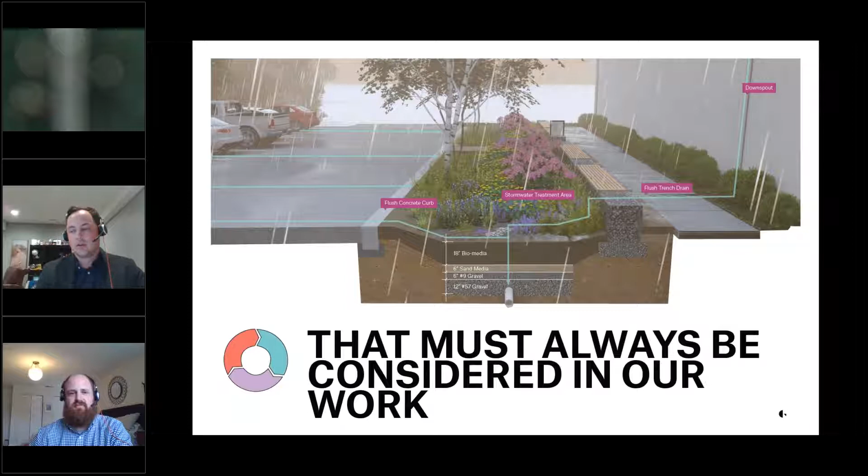This is how we've tried to weave this into our personal practice: those layers and systems should always be considered, whether we're talking about a small corner parcel development or a really big park master plan. We can always be thinking about these multiple systems at once.

So with that as our baseline understanding, we're going to walk through four projects. Matt will get us started. We're going to go from scale, smallest up to largest, and they're all pretty different types of work. We'll roll through those, and then do a little Q&A. I'll do my best, Matt, to advance the slides in a timely fashion.

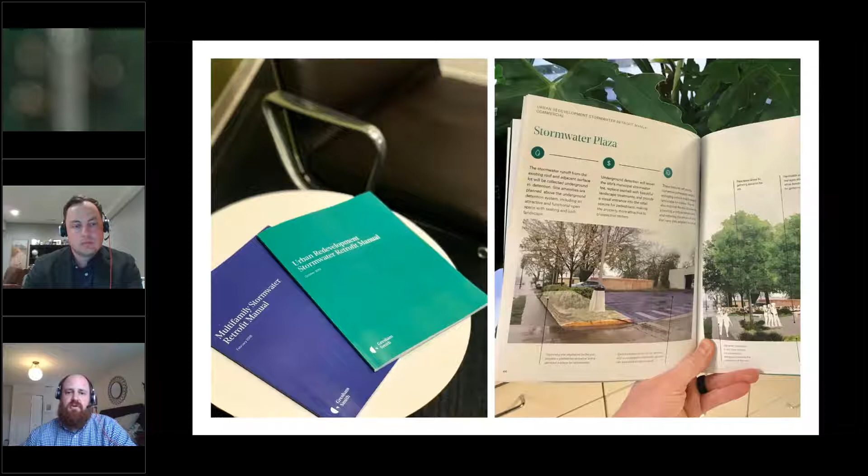The nicer you make these developments, the more rent you're going to get, the more you're going to fund the development. So our goal with these studies was: how can we revitalize these projects instead of ripping them down and building something new, which is extremely disruptive?

Just a little bit of background: all of these projects were located in the Royal Springs Aquifer in Lexington, Kentucky.

Stormwater quality there is absolutely critical and paramount, because that is the drinking supply for Georgetown, Kentucky. So everything you do in that region directly affects the residents of Georgetown, since that's where they get their water. Just a unique piece of it.

While we only studied a small piece that was in the aquifer, this is equally applicable to everything within Lexington and any other community for that matter. None of this was geared explicitly toward Lexington.

With this particular study, we looked at three different projects for this client. We looked at a large one, 150 Northland—your typical multi-building parking lot with drive aisles.

We also looked at one of the medium-sized properties, the 900 block, which was four single-family buildings converted to duplexes, triplex, and quadplex.

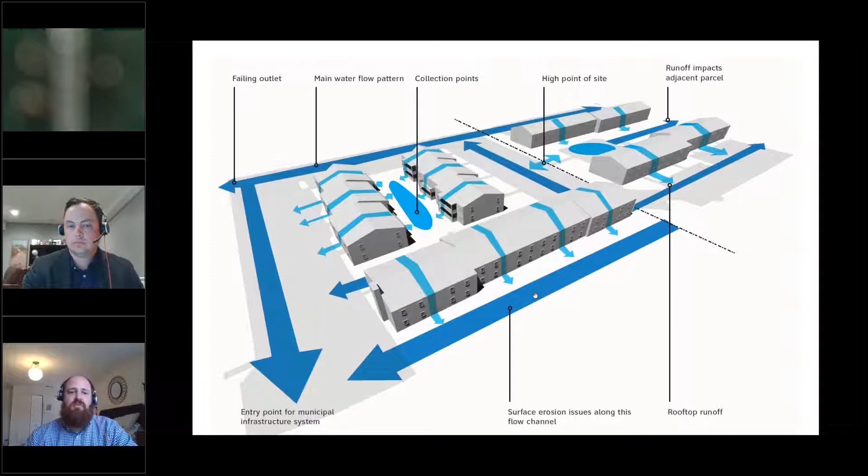So, you know, those were two obvious areas. And then the roadways around it, that asphalt was prime target for rehab. Just to give you an idea, that pool area - just before and after, coming up here in a bit as we go through it. This was one of those areas where we felt like we could spend that same dollar three times and really get the most bang for our buck.

So, big picture, we started looking at this area. We were looking at roofs. We were looking at how we can get that stormwater in there. We were also looking at what else that area could be - it didn't need to just be a stormwater facility. So you can see we've got a lawn gathering area, and some seating around that.

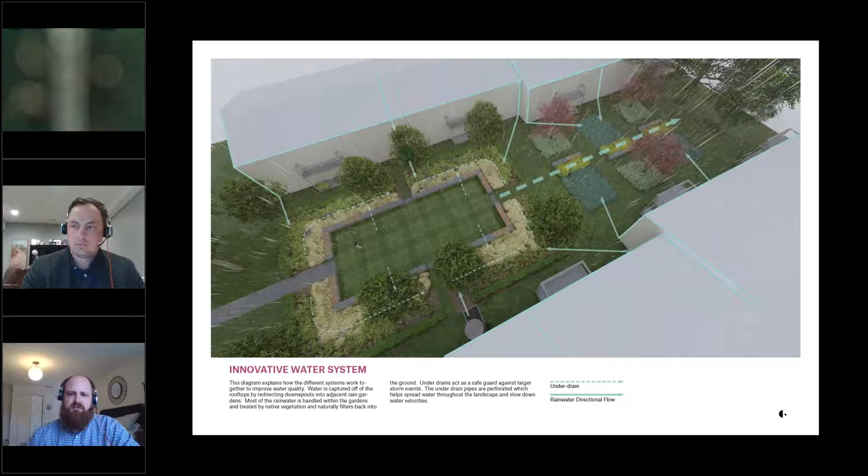So we had a thought, we had a plan. If you go to the next one, once we got people to buy into that, we could really dig in and detail what we were going to do. Each tenant had a little patio next to their unit, so we could see how this communal space was going to relate to their personal space. We had the BMPs with the vegetation in there.

These were going to become biofiltration areas with vegetated plantings. And most importantly, we're going to build that gathering lawn. So where it used to be an aquatic pool, it was going to become a flat gathering area that could be used for a multitude of different things.

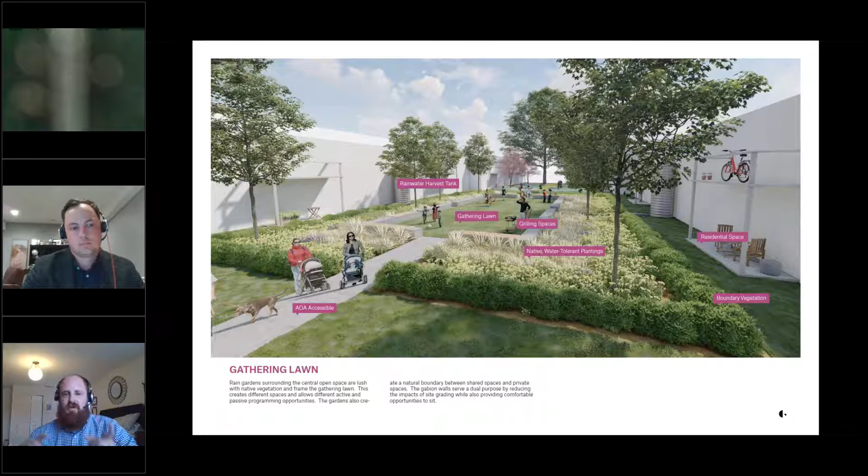We knew we were on the right path when the day the contractor ripped the pool out and then backfilled it flat. We had to wait a little bit to get another permit. Immediately, people were out there using that new flat vegetated area for a gathering space, playing soccer, doing all the things we said they were going to do with that area. So that was really enlightening and reassuring that we were on the right path.

So you can see here, you've got the bioretention facilities ringing the seat walls, you've got that lawn area to gather, you can see the interaction between the units and this area. So it really brings a lot of life to what was once a dead space.

And yes, I have always worked for landscape architects, and so that's how I don't talk like an engineer always.

One of the big pieces - two things about this. One, this is a stormwater grant project, so education, teaching people about stormwater is obviously a really important component. So there is educational signage all over the place, helping people understand what they're using and its function back to the environment. The other reason I really like this picture is I feel like even though we did have a fairly tight construction budget, I don't feel like we skimped on materials.

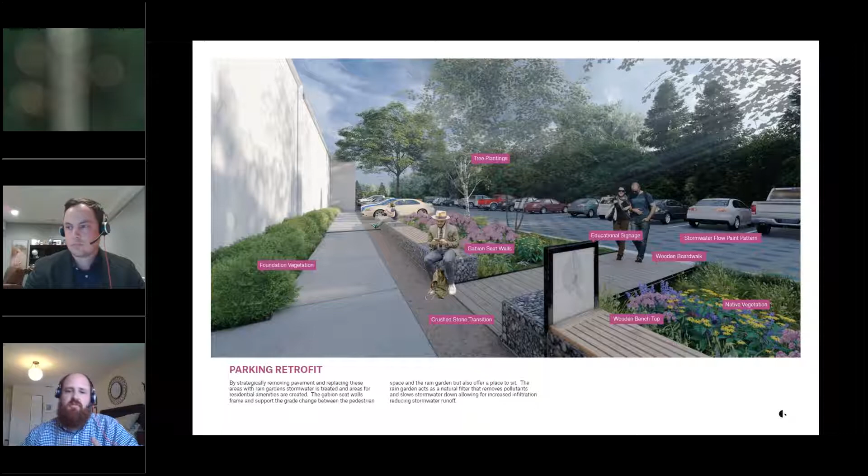So we were able to take this kind of pre-developed condition - and again, this was the vision that we had going into it - and we turned it into a gathering area. This is near the end of the development, so it was an area where people could gather and not get a ton of traffic going through. It picked up, again, roof drainage and parking lot drainage, two of the worst polluters out there. And again, this was one of those standard bioretention facilities that we put in the ground.

And it creates, again, a really nice area, and I think it does everything we were trying to do. Go one more.

Really one of the coolest things, I think, is we took what used to be some typical but not great apartments where you had cars parked, lights shining in, bumpers literally like 5 feet from your wall. Now these particular units look out onto a vegetated area, they don't have cars shining into it, so it really brings a lot of value to those units.

Yeah, I think one maybe piece to wrap this up, and the manuals that Matt described at the beginning, we have both of those available. I think both of them, definitely the multifamily one, available on our website, and I think they're available through LFUCG's website also.

This idea with green infrastructure is that it not be an afterthought, that you don't simply bury the infrastructure underground, or put the detention basin off in the corner where it's just doing its one job. I think the point we're trying to make here, and I have a very cheesy tagline for it like I do with most things, is thinking about BMP, best management practice amenities.

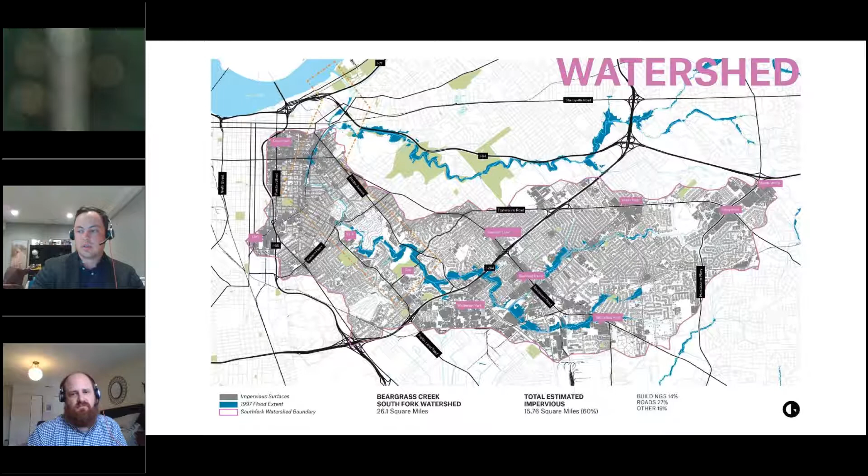And a lot of it was built out before there was a lot of stormwater regulations. So you're unfortunately getting a lot of untreated stormwater.

So again, the idea was, we want really big ideas, don't get hemmed in by all the stuff that we typically say, oh, you can't do that because of this or that, but also built on incremental action of, okay, these are the big ideas where we want to get to, but what are the little things we can do now to set the precedent and make that happen?

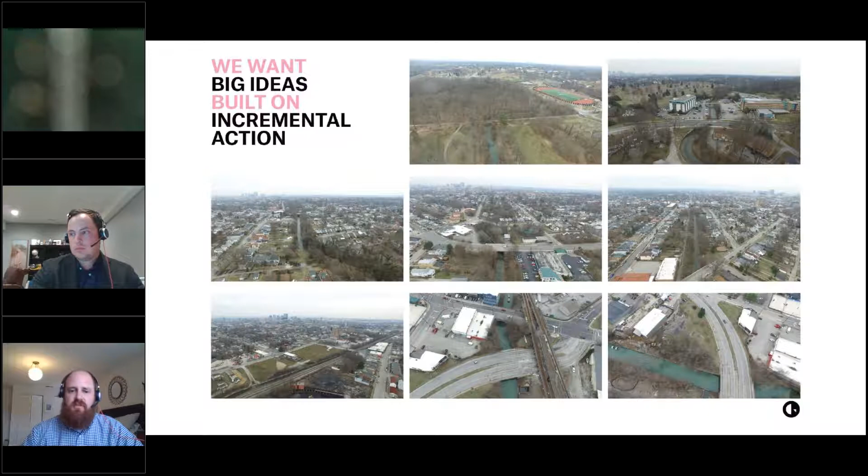So these are just some pictures of the different pieces of the stream as you go, working upstream and downstream. So the project started off with a creek crawl, distant relative of the pub crawl.

So we started at the downstream end and worked our way out. This is one of the more urban pieces of the stream—basically a concrete ditch right down through there. They've built the walls out of concrete, the channels out of concrete, so as it floods the water keeps moving down through there.

But you can see already people have used it as a canvas. They're using it for public art, and some people call it graffiti. But anyway, the idea was to experience the creek in all of its pieces.

That was done throughout the first part of the day. This was a 3-day process, so we took what would have been weeks or months worth of work and condensed it down into those 3 days. The first part was getting an assessment of what was out there today.

One really important element for all of these—you saw it in the first one with some of the educational signage and ideas like creek crawl—is really getting people to these places to see it.

What I thought was really cool is when we did this, there were a lot of people from MSD, from Kentucky Waterways, people who I would have thought are the stream experts, stormwater people who are really passionate and care a lot about this. We were able to take a number of them to places they had never been or seen.

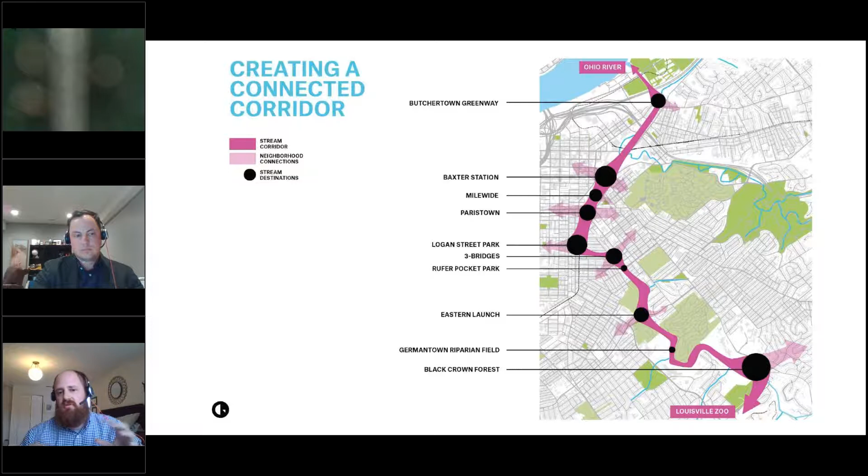But the big thing is, like Lewis said, how do we get people to stop turning their back on the creek and embrace it and see it for what it is? These were some of the opportunities identified through there.

And the incremental actions, a podcast tour, the turtle ramps, boating events down through the creek. How do you treat the buffers along it in a more native way? How do you promote native plants instead of invasives? And I'm always impressed by the ideas people come up with for tactical urbanism—projects that can be done quickly and inexpensively that build momentum for the bigger projects coming up. That's what amazes me, the thoughts people come up with.

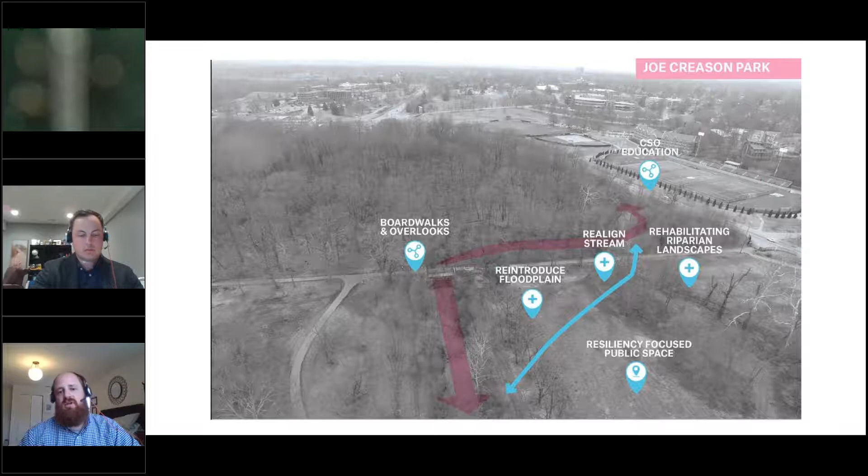Joe Creason Park, this is at the very upstream end, and this is where we didn't have many of those constraints, like development on all the sides. It was just a matter of thinking, okay, how can we improve the floodplain? How can we improve the educational opportunities? We came up with a vision of what it could be, not what it should be—a pie in the sky idea of here's what it was, here's how we could really improve it and make something really cool out of this area.

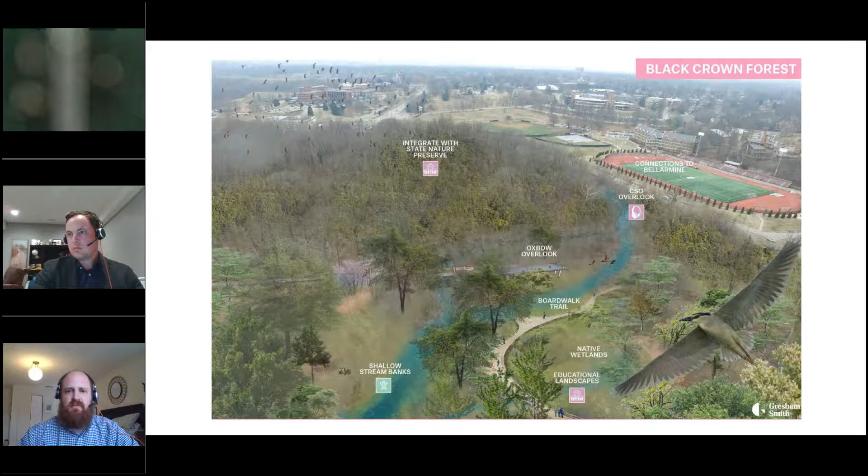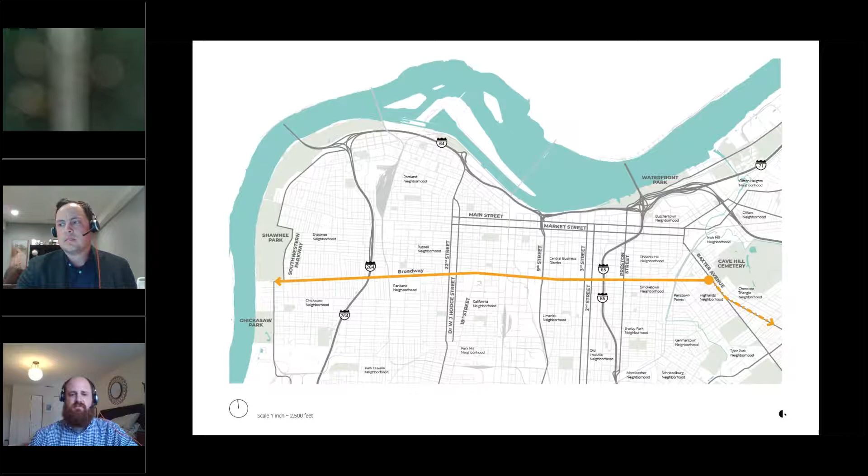But the city saw the need to really be rethinking, and the city with partners like TARC, KYTC, the Downtown Partnership, and others really saw the opportunity to rethink how Broadway works. Broadway's been working one way for a really long time, and needed to be reevaluated because of its importance to the community.

So one of the things we felt was really important when thinking about corridors—we might call this a complete streets project—we wanted to really expand internally to our team, but through this project, how we think about what a complete street really means, and not just think about within the roadway itself. That complete street doesn't mean just bikes, pedestrians, cars, and trucks. We wanted to start thinking about that vertically also.

So to really have a complete street, we think about what's underground—utility infrastructure and resilience there. We know Broadway has MSD's really old sewer pipe underneath, a brick-lined sewer that's failing in places. And we need to be prepared for, or allow for, future technologies to come in—thinking about fiber internet and all these other things we couldn't possibly even anticipate now. So how do we build in that sort of ability for growth?

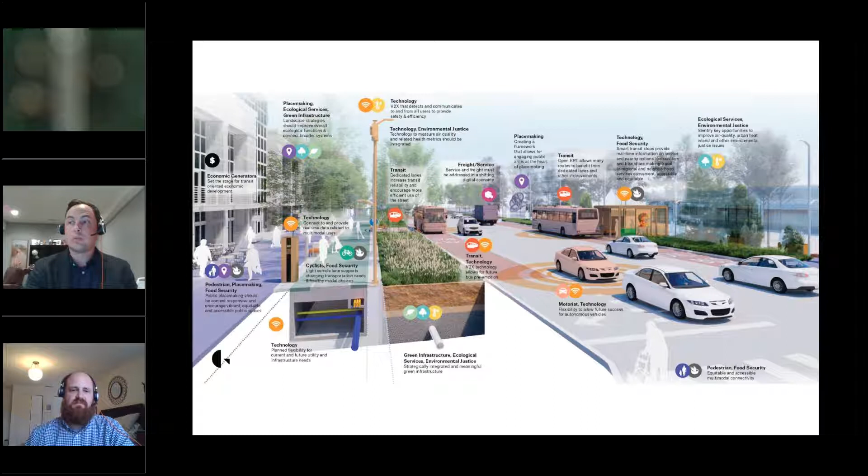For this project in particular, we're following the framework the city has developed through the CHASE principles, through the city's Plan 2040 and the comp plan—connected, healthy, authentic, sustainable, and equitable—which I think is another way of approaching sort of a triple bottom line approach.

So really thinking about these multiple systems and how they all land here. In some of our early research, we tried to pull out this information to help people think broadly about the potential of this corridor.

When we think about connectivity for Broadway, or for any of our roadways in our cities and counties throughout the state, TARC Route 23, which runs up and down Broadway, carries 1.5 million people a year. I tell people who don't ride buses that, and they're astounded because they don't think about it. They think nobody rides the bus. That's just not true, especially on Broadway. 6,400 people board a bus along Broadway every day.

I think we'll see the map here in a second, but the number of routes that converge on Broadway is huge. This next one was my personal favorite. The map was a little too big to reasonably put into a presentation because it would break everything, so it was the scooter data. The city was great and got us all of their scooter data.

In just one year, there were over 30,000 scooter trips that touched Broadway, which to me was shocking. Not just because I can't picture 30,000 scooters, but because Broadway is built almost entirely in a way that does not encourage people to ride a scooter. Thinking about ADA accessibility, traffic speeds, the danger you'd face as a person on a scooter, we've done everything we can to make it an environment you wouldn't want to ride, and still 30,000 trips were made that touched it. That says there's latent demand just waiting to go if we could get the right infrastructure in to let people do it safely and comfortably.

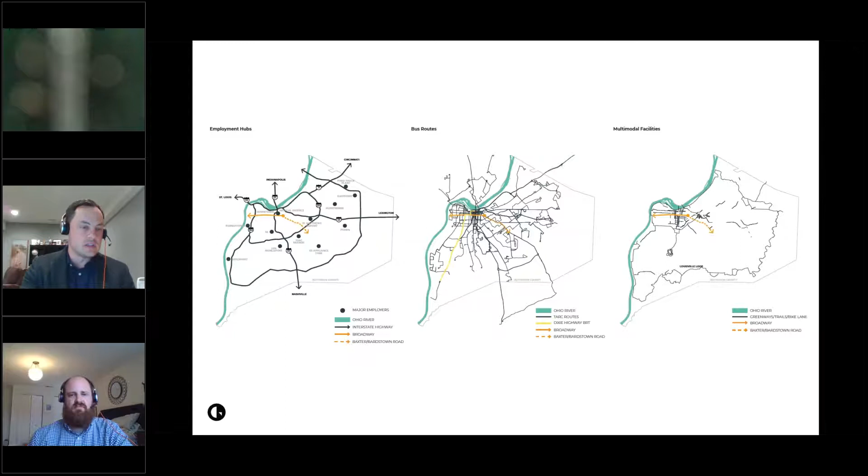Thinking broadly about multimodal bike facilities, Broadway has the ability to connect to the Louisville Loop. So in theory, you could be on Broadway, get on the loop, and go anywhere around the edge of the entire county if you wanted to. Thinking about how those systems are all integrated is also important.

I think this is a great thing to think about in the moment we're all in right now with COVID and the challenges we've faced, especially early on—but still with TARC and people not feeling comfortable enough to get on a bus, or people needing and wanting to walk and bike more places, we're putting them into an environment where they're at high risk of injury if they get into a wreck.

That's really dramatically impacting people that have lower incomes and less modal choice. So thinking about the resiliency in our transportation networks from that perspective is critical.

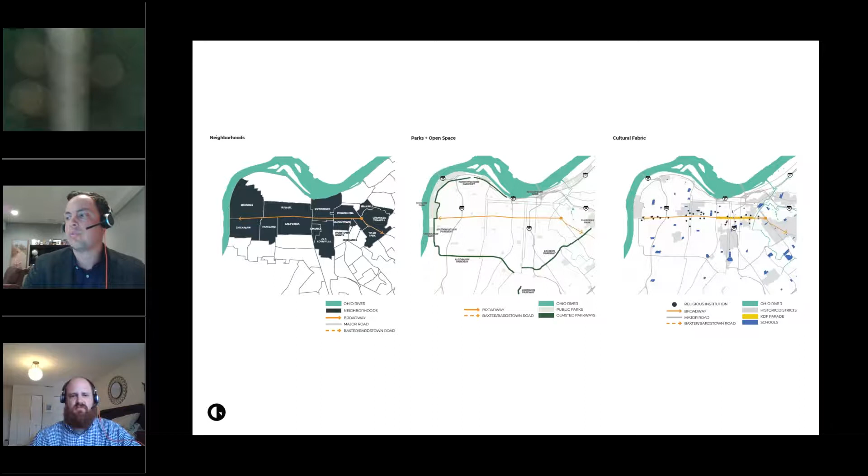We used to have cruising on Broadway. We've seen this year protests on Broadway. Broadway is at the center of our city for a lot of different reasons, and it connects a lot of different religious institutions, beautiful buildings up and down, and really key places for the cultural fabric of our city. So thinking about how that all relates is important.

When I mentioned earlier about the broad base of health, the other piece to me is the sustainability side. Thinking about air quality, urban heat island, water quality, all of those sorts of things that do have major impacts on people's health.

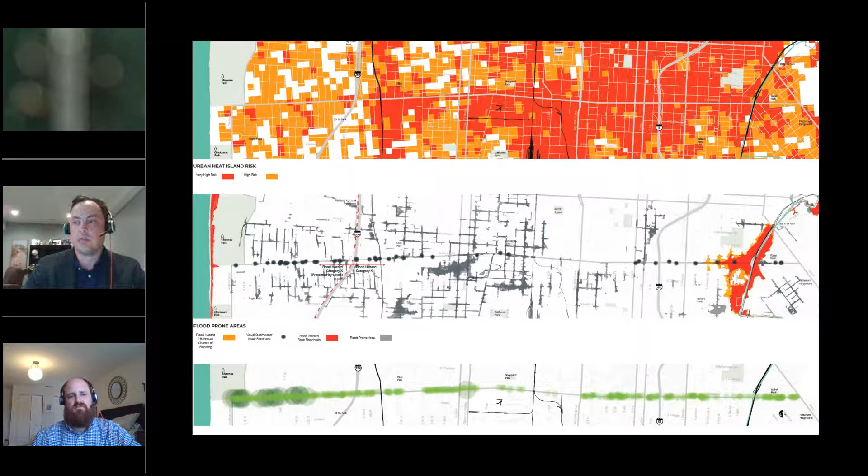And those capacity issues are creating major problems, like around Maple Street, which is the biggest blob in the middle, where houses have had to be bought and people had to be moved and displaced because of that flooding. So thinking about those interrelated things along our corridor that we can't necessarily fix within Broadway, but I think it's important to continue to figure out how we can help improve and call attention to those issues. And then finally, thinking about equity.

I've already talked about this a little bit, but thinking about that we are a major commuter route to some of the largest employment centers. Over the last decade, and this is a national statistic, the proximity of job centers to high poverty communities has declined by 61%. So we're putting people with the least modal choice further and further away from where they work, so they're spending more time traveling, less time at home, or less time at work.

I can speak from personal experience riding TARC. I was on a bus going home with a guy who was going to work at Ford, and if he was late, he was going to lose his job. So there are major resiliency factors in transportation systems that not everybody appreciates.

This isn't impacting everybody the same. This is impacting, in Louisville especially, our Black communities the most and people of color the most. And that's an important thing to remember. There are people without access to vehicles, and it's important for folks to remember that, especially as we think about the future of transportation in Broadway.

We went and talked to folks on the street. COVID's made these things extremely challenging, but we started these conversations at bus stops with people in the morning. One of the things I'll never forget was the theme we heard, especially at these bus stops in West Louisville, about what was the biggest issue that you were facing.

A lot of folks talked about access to food, which I think when we talk about a complete street, access to food probably wasn't on our list of things we needed to be thinking about, but that was clearly incorrect. That had a lot more to do with the lack of groceries in West Louisville and the amount of time it would take for somebody to get to one that had what they needed. For folks with modal choice, going 1 mile or 5 miles to get your food from a grocery store isn't a big deal, you might not think twice about it. For some folks, that's an enormous amount of time spent to just meet daily needs.

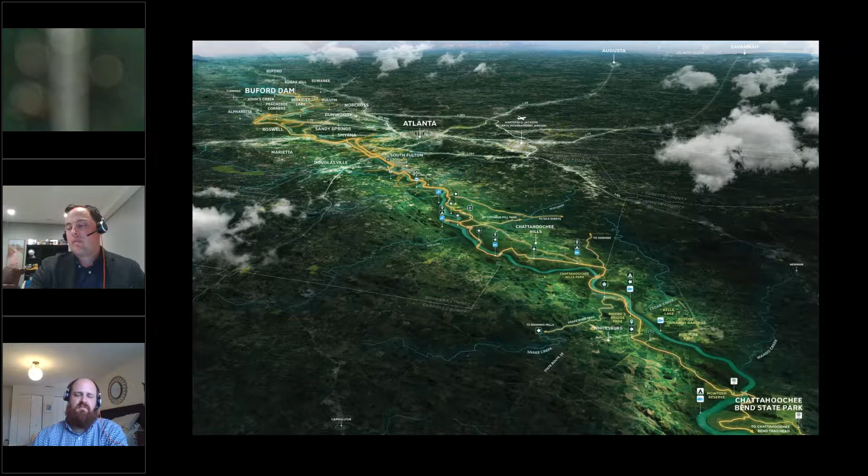This project was really interesting in that, whether or not you're familiar with Atlanta, we were tasked to come up with a master plan for this greenway system along the Chattahoochee River, and the study area was 100 miles. So we've gone from 6 miles at Broadway to 100 miles in the Atlanta region. That by itself was an overwhelming task, thinking about end to end how you deal with all these different constituencies, needs, and challenges.

I called it, when we were going through it, the Beargrass Creek project sort of the mini Chattahoochee, because the Chattahoochee River, Atlanta, I think, is the biggest city in the country not built directly on a river. This image exemplifies part of the issue, which is when you see the Chattahoochee, you see it and say, oh, there it goes, because you're on a highway going 60 miles an hour, and there's not that many chances to get down to it unless you're in one of the big state nature preserves or national parks.

But when you do get to it, it's astounding, it's fantastic. The Palisades along these places that people can get access to, which is very inequitable if you look at 100 miles of access, where people can and cannot get to it.

But they have this system that is so important, and it's a very different sort of situation in that the amount of drinking water coming from this river is for this city, but also for the folks south of it. So Georgia and Alabama, all the way down into Florida, there's lots of big political discussions about the water, access to that water, but also the quality of that water. That's a really big deal.

As we got into this project, thinking about 100 miles and trying to bite it off into manageable chunks, we divided it into 3 sub areas, thinking about contextual approaches to planning across that 100 miles. The northern sub area, number 1, was really about the suburban parkland, so much more suburban in nature, with large lot tract homes and subdivisions, golf courses, that sort of thing, but also a lot of the national parks happening up there.

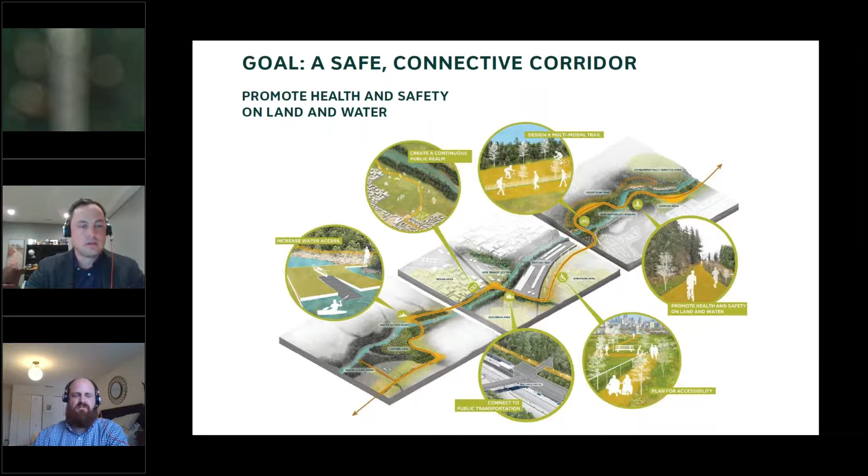Really thinking strategically about accessibility and safety. I think that was a big role for us in the transportation components, connecting to the train lines that aren't quite there, and how we get people to promote healthier and safer modes of transportation along the river itself.

Creating a common ground for all—thinking about how we can create more places for people to come together, whether we're talking about older brownfield sites and rethinking those, or just creating more destinations, more places for people to go.

One of the balances here is that a lot of the neighborhoods we talked to, especially in sub-area 2 and more downtown Atlanta, were very cognizant of gentrification and displacement. There's a lot of fear about what happens when a city comes in and makes a huge investment, and speculative real estate starts to drive up land values and people get pushed out. That access then becomes much more inequitable because we're not allowing everybody to have that access.

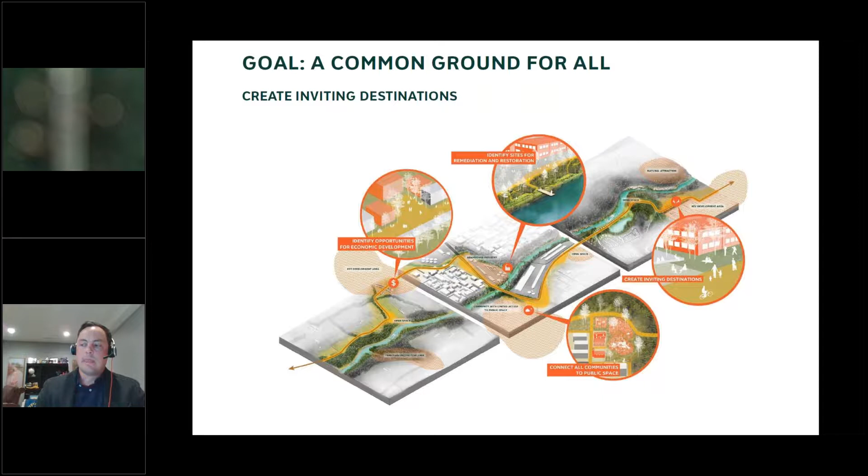So thinking about those sorts of systems is part of what we need to be thinking about. The ecology is a major component here. One of the funniest and most important things to think through is that we can talk about the water health of the Chattahoochee all day, but if you're not thinking about the tributaries that feed it, you're never really going to address water quality the way you need to. So thinking about tributaries, both from an access and a water quality standpoint, was important.

Enhancing overall ecological connectivity throughout—it's one of the more connective corridors in the region now, but it does struggle with challenges like invasive species, both plants and animals, and thinking about how all that works.

Atlanta did some really forward-thinking policy with the Metropolitan River Protection Act, put in place in the 70s, which is one of the reasons it's a major tourism component now, with fishing and other things, especially on the northern side. It was very important to work within those jurisdictional regulations so the river would continue to be protected, but also so the project would help make the waterway even cleaner and better than it is now.

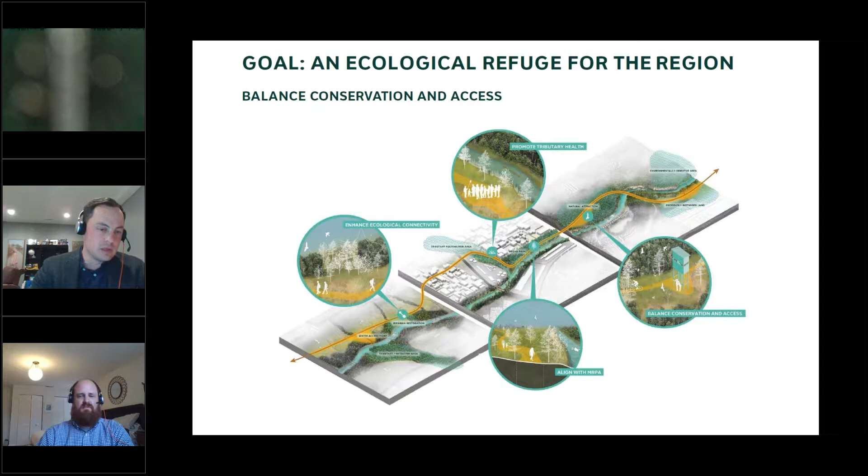Thinking about how you balance conservation and access—you want to get people to the beautiful places, but you don't want to then destroy them. That's a really important piece of this project.

And then the living legacy piece—if it's out of sight, out of mind, people aren't going to care about it. They're just not. That was a really big part of this project: how do we get people down there to learn the stories, including enormously important social justice stories about some of the historic spaces along the river, while thinking about how we continue to build advocacy and stewardship for the river by making it a more forward-thinking legacy project for communities.

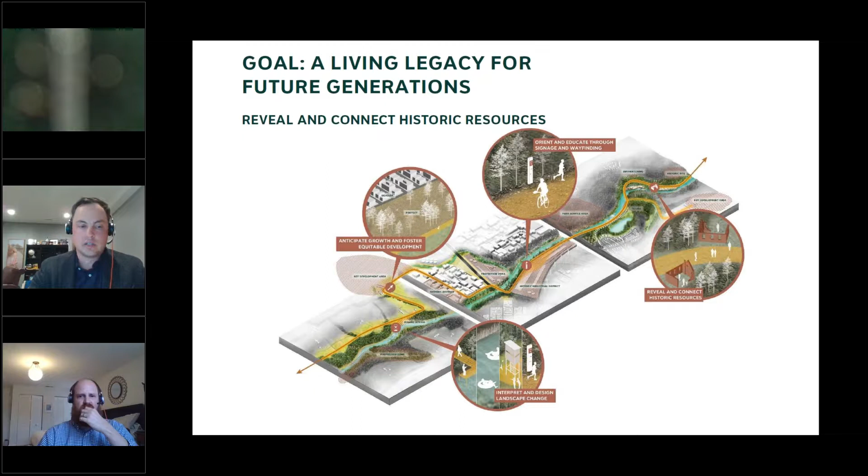We got to hear all these stories of people who grew up along the river years ago, who used to go down into the streams and catch crawdads or be baptized, and those things kind of went away over time. So how can we bring that level of connection back?

I'm going to fly through this, but thinking of it not just as a greenway but a blueway, also thinking about tributaries—both streams but also transit routes and other trails—how all that comes together to create what's known as the Riverlands.

We had the good fortune of working on this, which I think is a really great case study—they did the 100-mile plan, but they also asked us to produce a pilot project. So not only come up with a big idea, but test and figure out how this actually works on the ground.

My personal favorite was thinking about trails, putting boardwalks through wetlands, but finding moments where we can use that as an advantage for education—getting people down into the wetlands to touch and feel, and really appreciate what these unique landscapes offer, so they can continue to cherish them and build stewardship around these ecological systems.